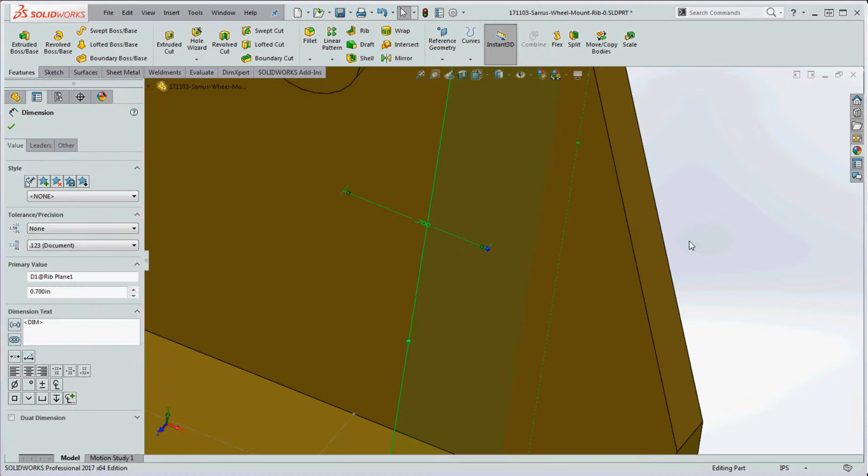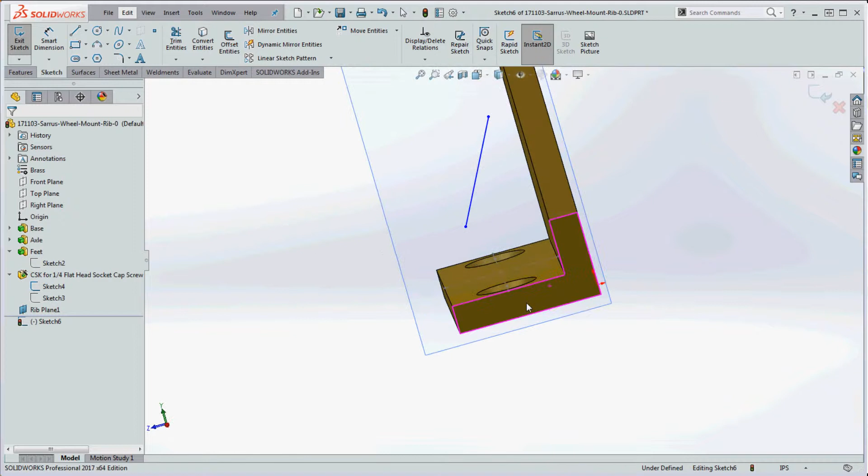We're just going to sketch a line. It's really easy to establish this - you don't necessarily have to have it fully defined. Let's go and rebuild this, and select this as the plane we want to sketch on. So what you want to do is just sketch a line out here arbitrarily, and it's going to put a rib in there.

Very simply, we're going to go up to Features, Rib, and we're going to choose a direction here. Now it's going in the wrong direction down here that we wanted - we actually wanted to go down here.

The rules of the rib are such that the line itself that's defining this has to intersect on a surface and then on an opposing surface on the other side. And the rib itself has got to be able to intersect on those surfaces too without hindrance.

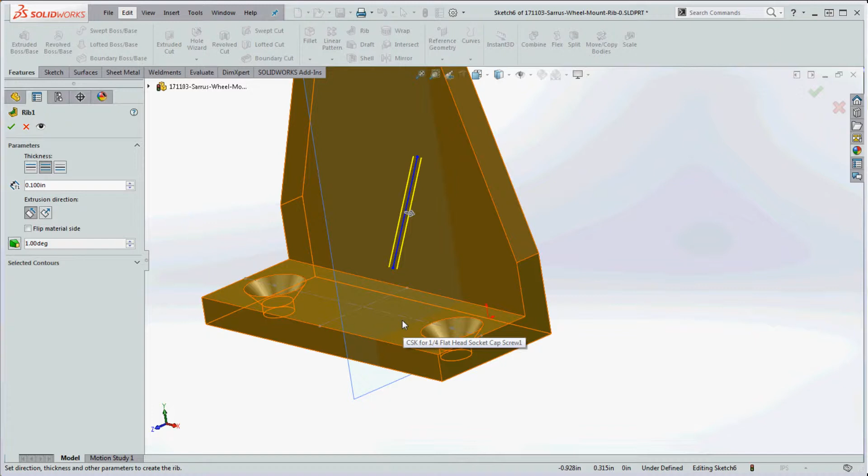It gives us an option down here for a draft, and typically with plastic injection molding, you probably want to have a draft in here. 2 or 3 degrees is probably okay. So click on the draft button. We're going to exaggerate that and put in 5 degrees. And if we go to the green check mark, now we have our rib.

You notice we didn't have that line fully defined, and here's our rib feature down here. If we were to right click on that and move it around a little bit if it isn't quite in the same location we want, we could do that too and rebuild it. Now that rib's a little bit smaller.

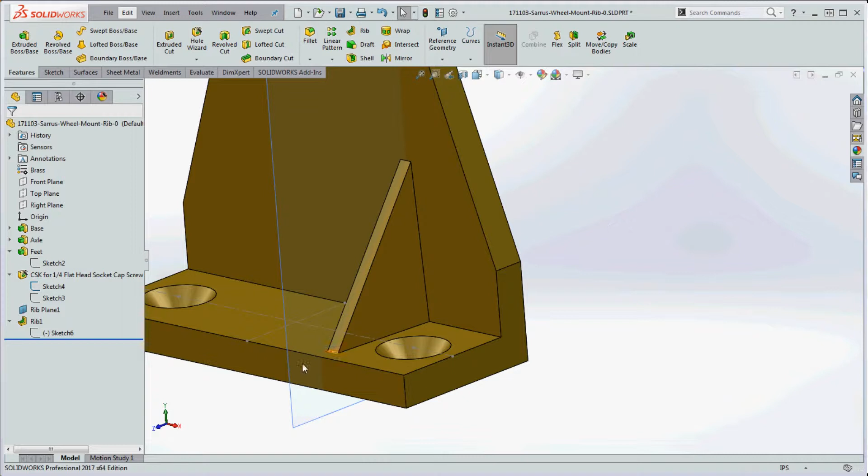So kind of like with all sketching, it's got a negative sign in here, which means you probably want to control that a little bit. We can go in here and actually define that. If we were to go normal to that plane, maybe park it down here and put some constraints in there, we could do that too.

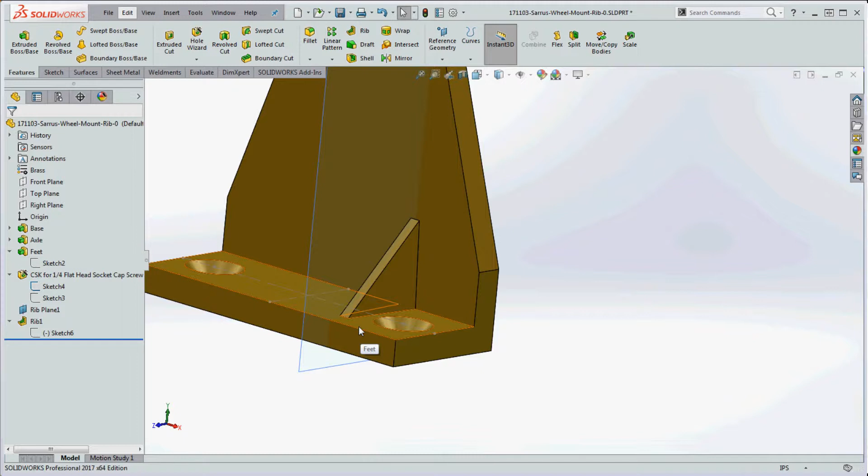If we were to actually extend it over on the other side, what do you think it's going to do? Let's go and rebuild it and see what happens. So you can be really loose with your sketches - you're still going to put that rib in there as long as you follow the rules: the line has got to at least terminate or go beyond one surface on one end, another surface on the other end, and then the rib feature has got to be able to terminate on those surfaces too.

So we could define this a little bit better. We're going to go normal to maybe pick up that edge over here, and then we can put in dimensions to make sure it doesn't go off to the side and other things. But let's just try one more parameter in here and see what that looks like.

Doesn't like it, it's failing. So it's breaking one of the rules. The endpoint of that line does not intersect with that surface on the solid body.

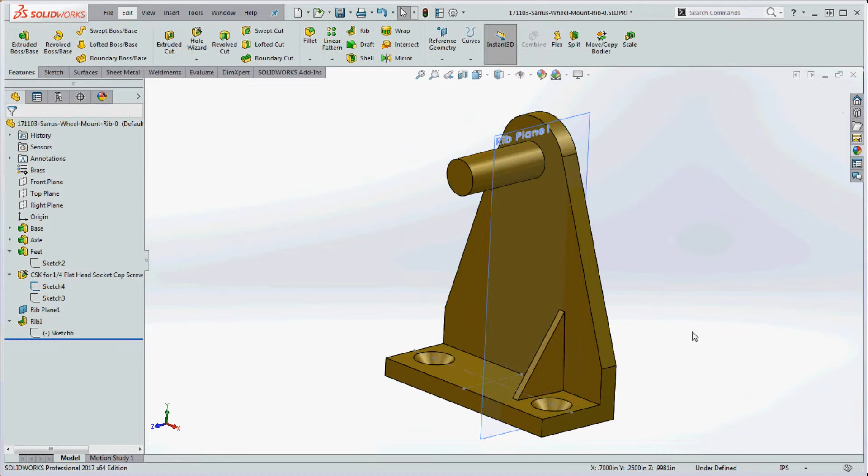But again, we can go back to that sketch, move that in a little bit, rebuild it, and then it comes back again. And you'll notice it does have that draft angle here too.

So to finish this up, for a plastic injection molded part, probably want to put a fillet on the edges over here, to give that a little bit more of a finished look.

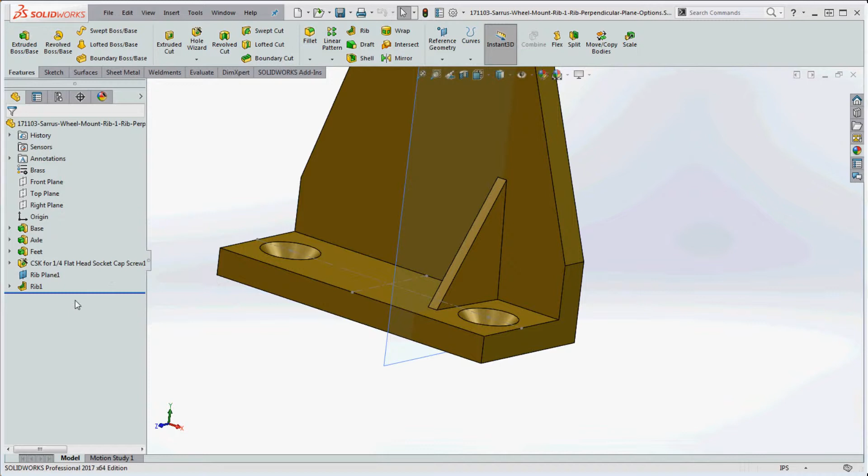Okay, so let's have a little bit more fun with this. Let's go ahead and use the rib on a different plane. Let's roll that rollback bar back. Now let's click on this and maybe the top plane, and let's define a whole new plane.

So if we were to go over here to reference geometry, we're going to go ahead and put in a plane. Right now it's just going to be perpendicular, but let's go ahead and put an angle on that, let's say about 60 degrees. And now we have another rib plane.

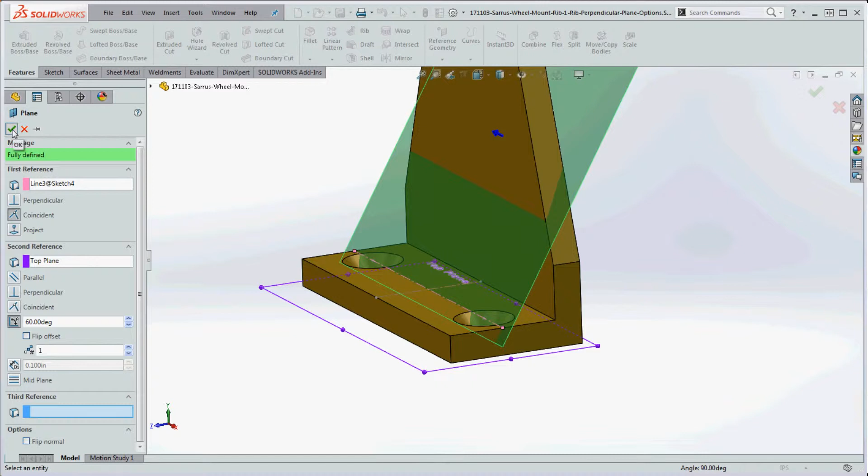So now we can sketch a line on that rib plane. If we go to sketch, let's just do a linear line. We don't necessarily have to make that perpendicular, but one of the rules with that—it's not even on that plane.

So let's go ahead and get rid of that sketch, rebuild it, select this plane, and do that all over again.

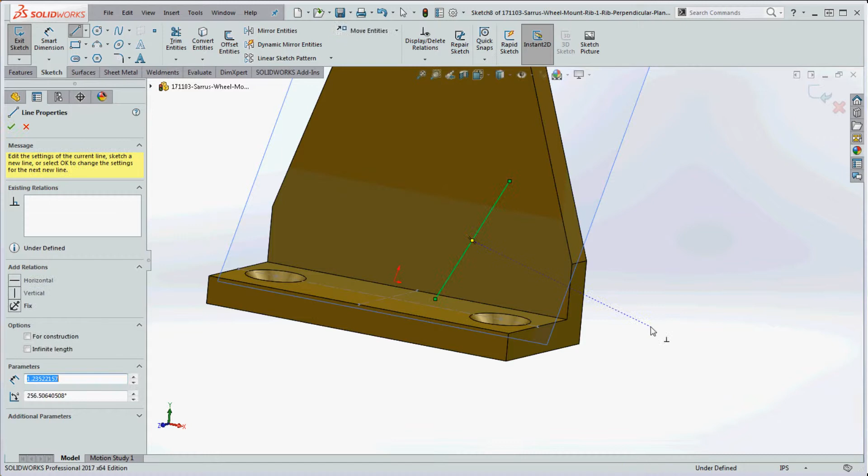So what we want to do is put a line on that plane. Not necessarily vertical, but let's kind of put it off at an angle here. Take a look at how that line's situated.

So the rule is, again, the line has to be terminated on either end, or has to either intersect or terminate the endpoint of that line on some sort of surface. And the same thing with the bottom part of that line too. If it goes off the surface like that, it's not going to work.

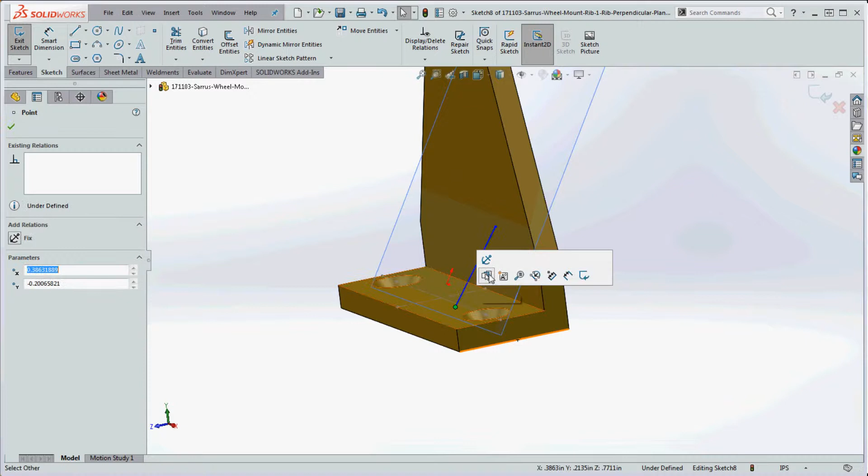If it goes through the surface, it'll work, as long as it intersects that surface. And then the rib itself has to be able to go from that line down to either surfaces where that line intersects, and it'll resolve itself.

So let's try that. Let's go up to Features, let's go to Rib. It's giving us a yellow preview, but it doesn't necessarily mean we're going to get what we want, and we need to turn that.

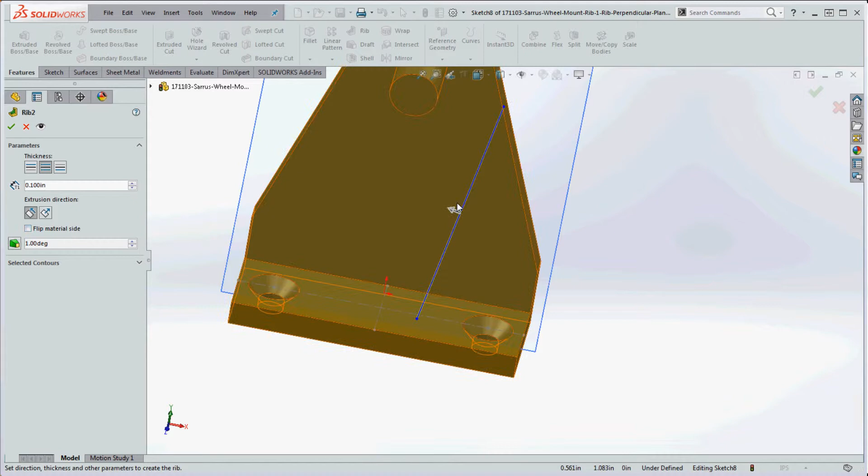So here's our options for turning that. We can go left or right by flipping the material side. We can do the same thing by clicking on that arrow. We can flip the material side, but that kind of violates the rules.

It's not going to terminate on any surface over here, it's not going to stop on any surface over there, so probably don't want to do that. But we can flip the material side, or we could actually go normal to the sketch.

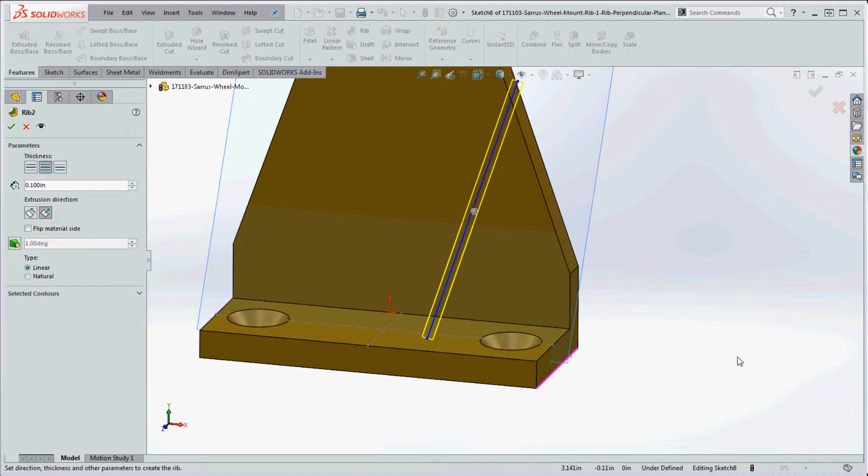So now we're normal to the sketch, but still going off in the wrong direction. So we're going to go ahead and flip that one more time, and now it should resolve itself. And if we go to the green check mark—bang, we have it.

So even though that line, if we were to take a look at that line, which is in the back—let's just go ahead and show that without all the angles associated with it and all that geometry that popped up. Now you can see that line's going off to the back, but it intersects this plane down here, and it's ready to go.

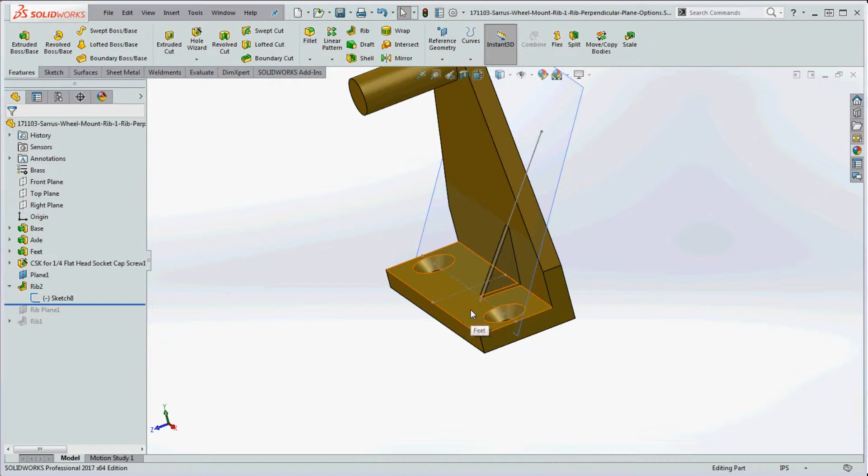So let's go back and play around with that sketch just a little bit more. We can pull that line in a little bit, kind of get it in the middle of the model instead of extending beyond it. So let's go ahead and pull that down.

Maybe pull this one up. Again, you could be really loose with your sketches in a rib, and it'll still resolve itself. So if we go to Rebuild, now we have something that's a little bit more oblique.

But, like typical sketches in a feature in SolidWorks, once you get the form that you like, it's probably good to go in there and fully define your sketch, so it doesn't move on you when you don't intend it to, when you make modifications to other sketches and features within your part.

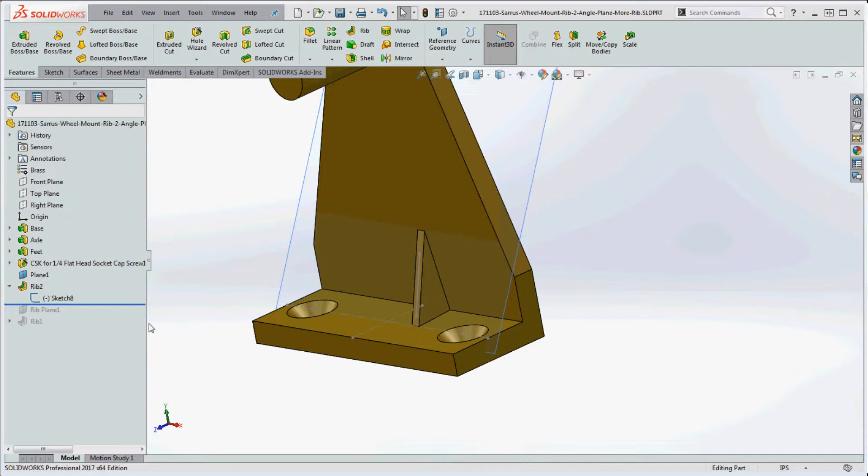Okay, let's take a look at some more options here. Let's go ahead and edit this sketch and do something a little crazy. Let's take that line and maybe put it right over that hole. If we put it near the hole, it's probably going to be okay.

It's going to resolve itself and drop into the hole and give us a solid in there. But if we go Rebuild here, it's not going to like that. But we can still take the endpoint of that line because it's not fully defined. Remember, you can do that outside of the sketch. And now you can see it resolve itself.

So it's resolving itself there, resolving itself here. And we're doing this outside of the sketch, so we're not having to go inside the sketch to make modifications. We could take the endpoint of that line and move that over here.

If we put that right over the hole, it doesn't like it. Put it over here, maybe. But it's definitely going to like it over here once it gets out of that hole.

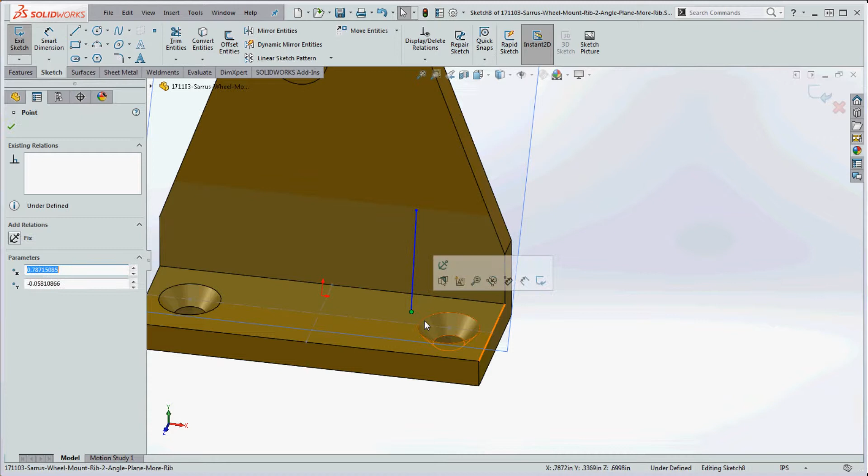So, I actually went in to edit the sketch, so let's go ahead and do that. And let's take that point and maybe put it over here, over there a little bit more, and when it clears that hole, it's able to resolve itself.

Okay, let's do a few more things. Let's look at some different applications of the rib feature. So let's take a rollback bar and roll that back over here above plane number 1.

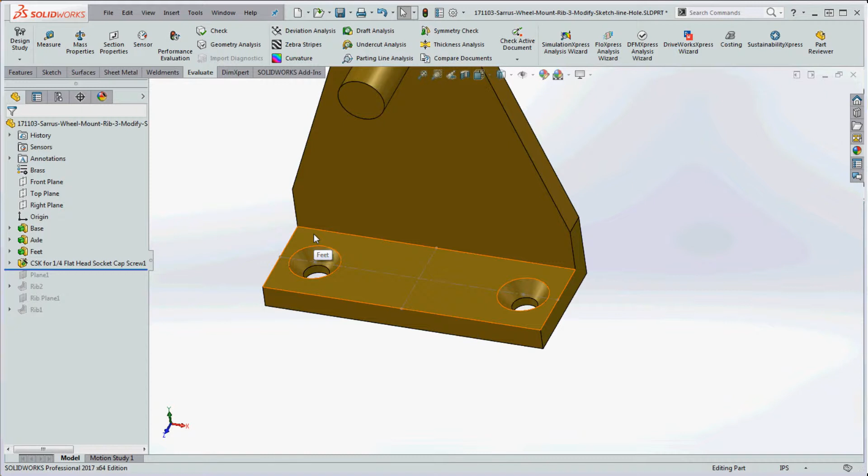And let's go ahead and maybe put a wall around these holes here. So what we're going to do is create a wall around these holes. It's going to create kind of a boss, and if it's a thin wall, sometimes you might want to support that, and a good feature to use for that is a rib, if you can imagine.

So we're going to go ahead and select on that face, go to Sketch, kind of click off here to the side, so we're going to select that face, and we're going to go to Sketch over here. We're going to go ahead and choose, again, that plane. And we're going to go ahead and choose that edge and this edge. With the Control key pressed, we're going to go to Convert Entities.

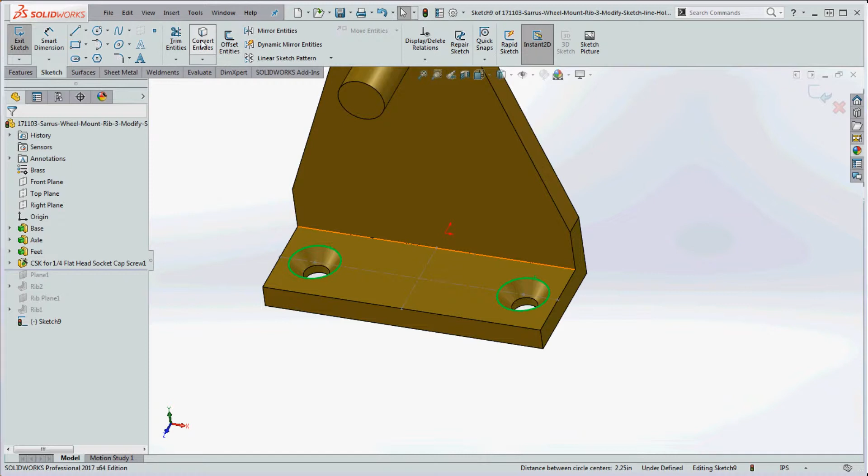Now we're going to go to Features, Extruded Boss Base. We're going to go down here to Thin Feature. Probably keep that at maybe 0.1. And let's go ahead and extend it up by maybe 0.4. And if we do that, now we can actually put a rib between this wall over here and that wall over here.

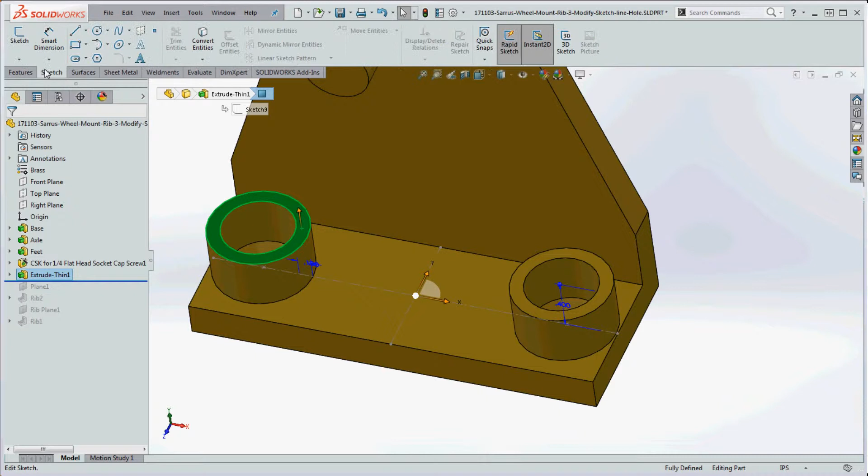So remember the rules. If we go ahead and sketch on this surface, go over here to line, we're going to make that line kind of go off to the side over here. It's going to try to extend that line until it meets the surface, extend this line until it meets the surface, or goes beyond the surface, or intersects the surface, and then it's going to go down. Once it's able to do that and go down, then it's going to go ahead and resolve its feature.

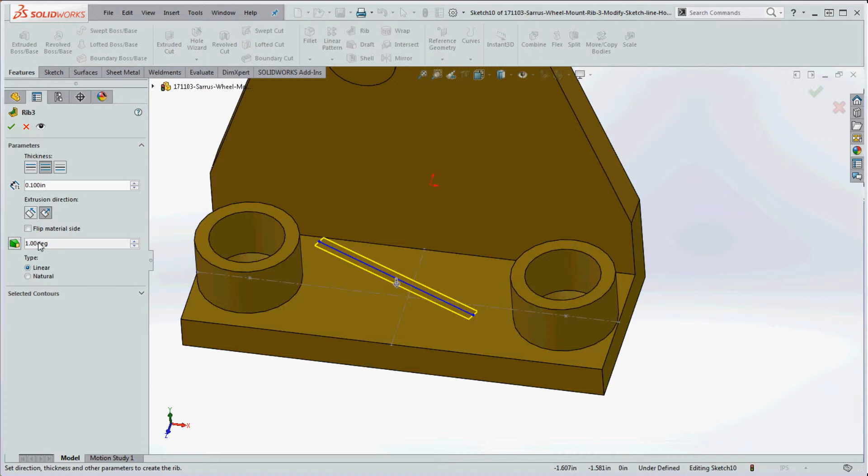So if we go to Features, go to Rib, we want to change the direction, so we want to go ahead and go down, make sure that arrow is going down. And we're not going to put a draft angle on it. We'll keep it at a 1/10 of an inch. If we go to the green check mark, it's not going to do it.

But we can take that line in here and maybe move that over here a little bit and try to do that again. So we'll go back to Rib, and in our PropertyManager, we're going to change the direction on that, go to the green check mark.

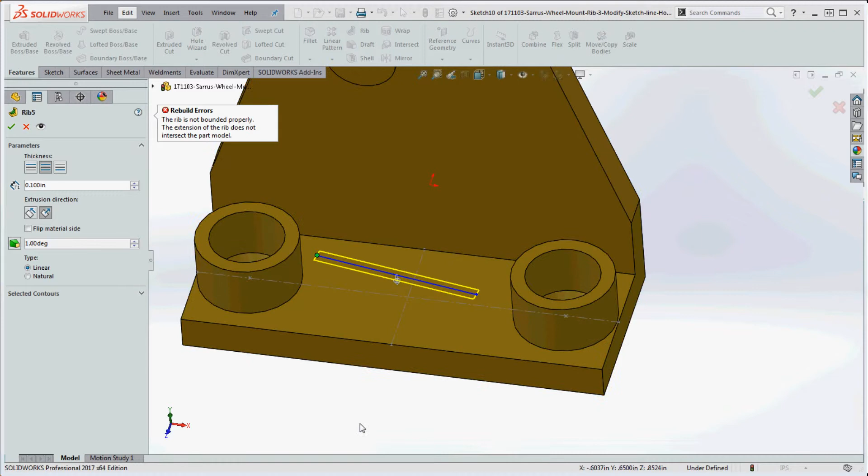Still not going to do it. So let's go ahead and take this line over here and do that one more time. Change the direction, go to the green check mark. Okay, well, it's still going off to the side. Yeah, that's a good idea to make that normal too.

Okay, again, back to rib. Change the direction, go to the green check mark. Now it's going to resolve itself. So that's one application, and if we put a draft angle on that, let's go ahead and try that, rib.

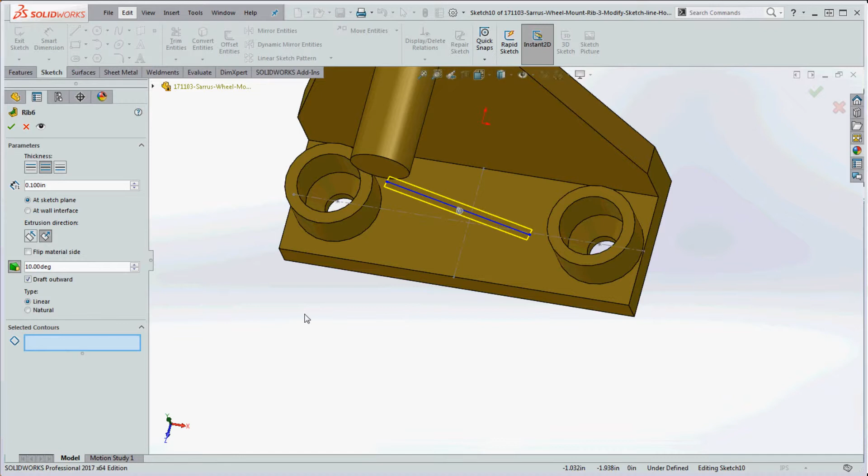6. Yours might be a different name. Let's go ahead and do a draft angle on it, and let's make that an exaggerated maybe 10 degrees, and go to the green check mark and see what that does. So what that does, and we don't want to draft outwards. Yeah, we do. But it looks like it's going off the model a little bit when we put that draft in there. So let's do this.

Let's take that line inside of this, and let's go ahead and bring that in a little bit. So we can do this.

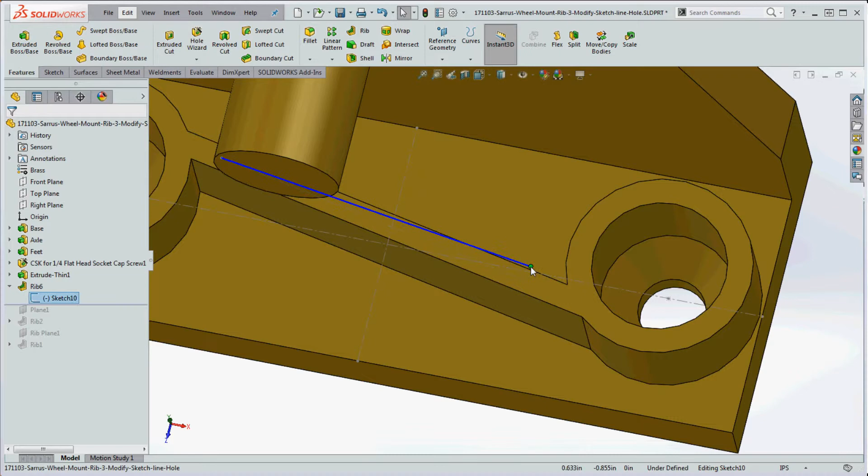I don't know if you knew this, but outside of the assembly, if we were to go ahead and show that line outside of the sketch tube, we can take these sketch parameters and actually move those around a little bit. And what it does is automatically rebuilds. That's a really cool feature.

You could do this in a lot of different features where you don't have defined sketches. It doesn't have to be necessarily part of the rib.

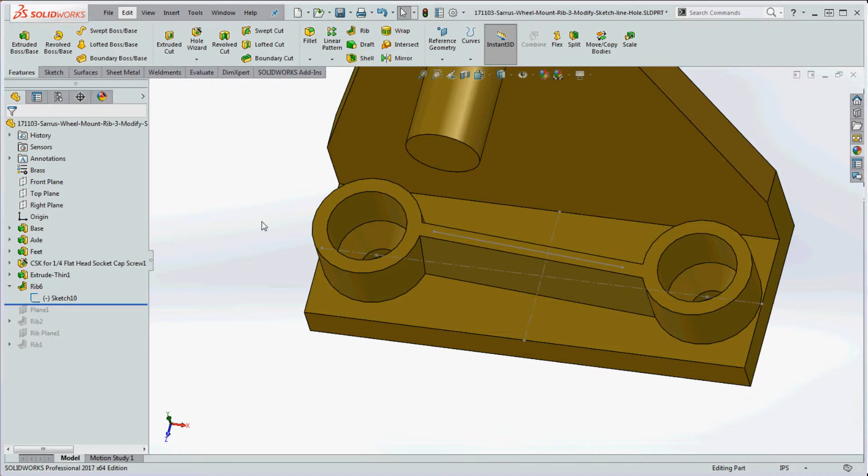And then now we can see that we don't have that draft angle on that yet. But if we go back to our rib number 6, go into that and put our draft angle in there of 10 degrees, now it'll probably resolve itself. So now we have that 10-degree draft. I think what was happening with that draft before is it was beyond the edge of this wall over here, and it didn't like that.

So another option over here with our underdefined sketch, if we were to right click on that sketch and do something different to it, let's go ahead and put a little bit of an arc on it. We'll put a tangent arc on the end of this and maybe curl that around and see what that does.

So if we were to rebuild that, so now it kind of does that. It takes that line, tries to terminate it at a wall that it's pointing to, and looks like it's going off to that wall over here too. But we can take that line and kind of tweak it a little bit, the end of that arc, and get that actually going into our model.

So this is kind of a very valuable tool, being able to make modifications to endpoints of lines and arcs and see what you like.

And if it's something you like, if there's a component over here you're trying to get around but still trying to support these walls, then it's a great way of doing that. You can get it around that component. Then when you get it, and when you want to fully define it, then you can put on your angles and your sketch relations and dimensions, get that fully defined.

Okay, so let's look at one last option in here. If we were to go to our rib 6, yours might be a different name. We can start from the top and actually work our way to the bottom.

So we kind of know what some of these are. It's kind of like a thin feature. We can favor it on one side. If we go to the green check mark, you can see how that resolves, and go back over here and do the same thing. We'd actually favor it on the other side too, rather than the middle.

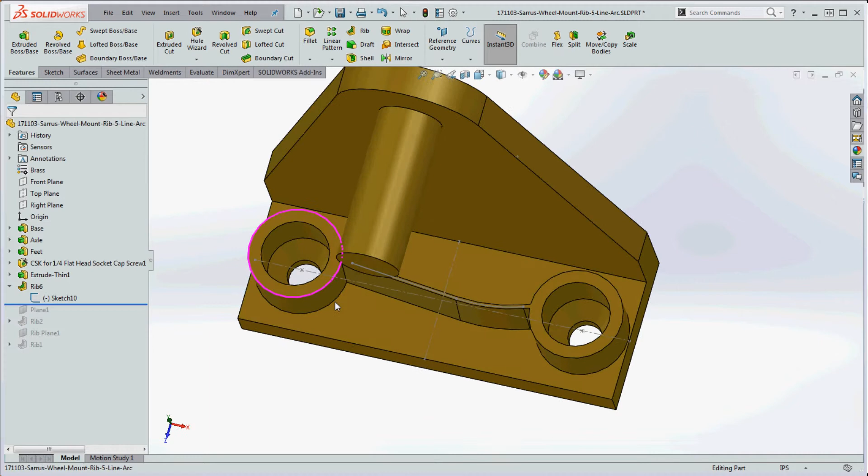Let's try a draft angle a little less than that. So instead of 10 degrees, let's do 5 degrees. So there we go. I think it was tapering up to nothing. If we made that rib a little bit thicker, it probably would have resolved itself better. So maybe 0.2 if we start down there at the wall instead of 0.1. Now if we did 10 degrees, maybe I'm pushing it over here, go to the green check mark, there it goes. So instead of tapering to nothing, it's coming up here, and it looks like it's resolving itself.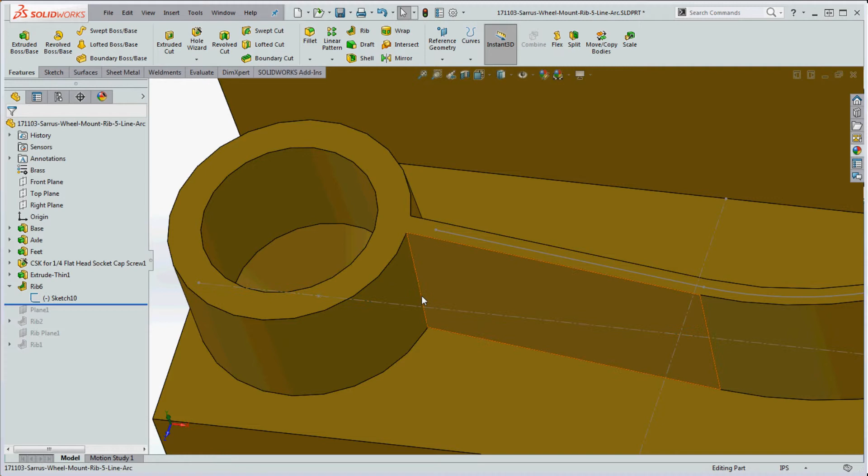Let's go back to our rib and look at one last final option over here. We can flip to the material side. We've already done that, started at sketch plane, and we've played with these buttons over here.

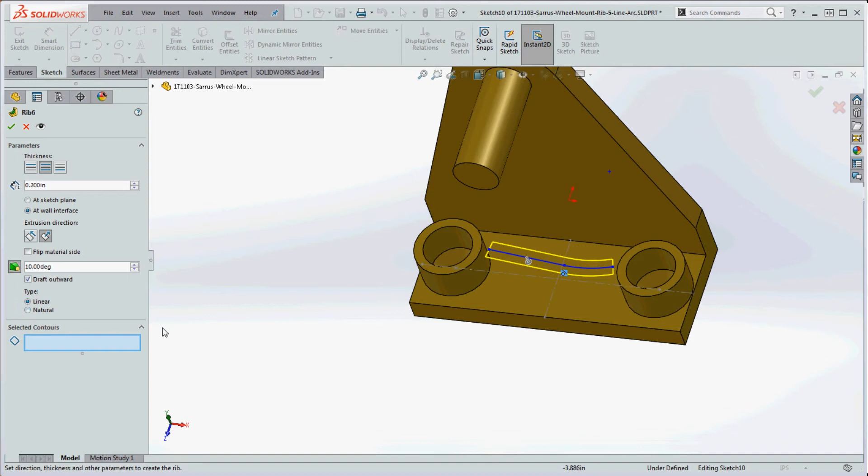But down here, we have the option of being linear or natural. Of course, everybody wants to go all natural. But the way this is going to resolve, if we think about this in regard to the linear function, and when it comes to the termination of that arc, it's wondering, well, what do I do? Do I go straight or do I follow the arc? If we choose linear, it's going to go right at the end of that and then go straight again. If we choose natural, it's going to curl a little bit and continue to follow that arc.

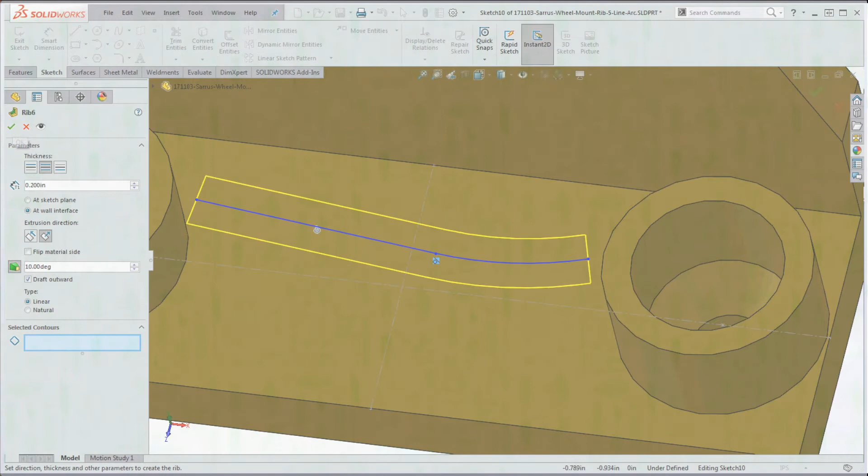So let's actually go to natural and see what that does. If we go to the green check mark, you can see it's got a little bit more curvature, but now we can take that arc and turn it out a little bit and see what it does. Turn it a little bit more so it terminates at that wall. Now it's ignoring this wall. So with a linear function, it wants to go into that wall, but now it's not going to do it. The arc is allowing us to do more stuff.

So now it's doing something weird here. It's actually trying to pick up some geometry elsewhere, and it's resolving that a little bit differently. So now it's not going to resolve itself at all there, but if you actually curve it over like that, it looks like it's going to stop right there at the very end of that.

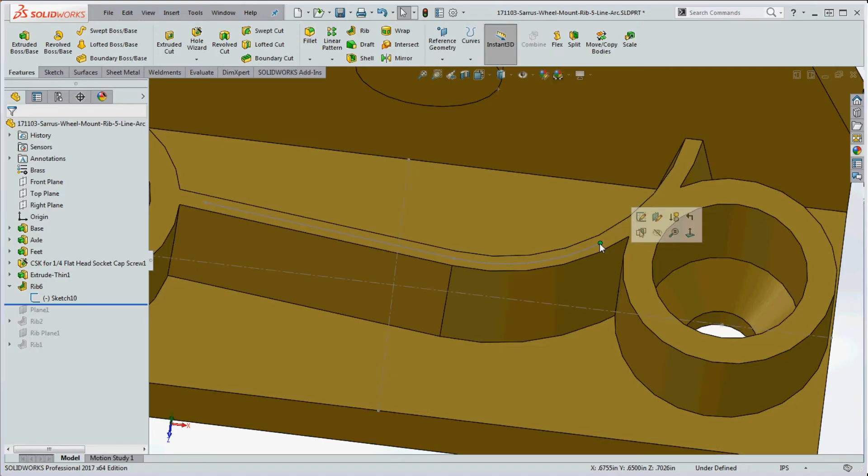So there's a certain extent that you can actually play around with this and get it to work right. In this application, we're just trying to put a rib in here to get a wall between walls.

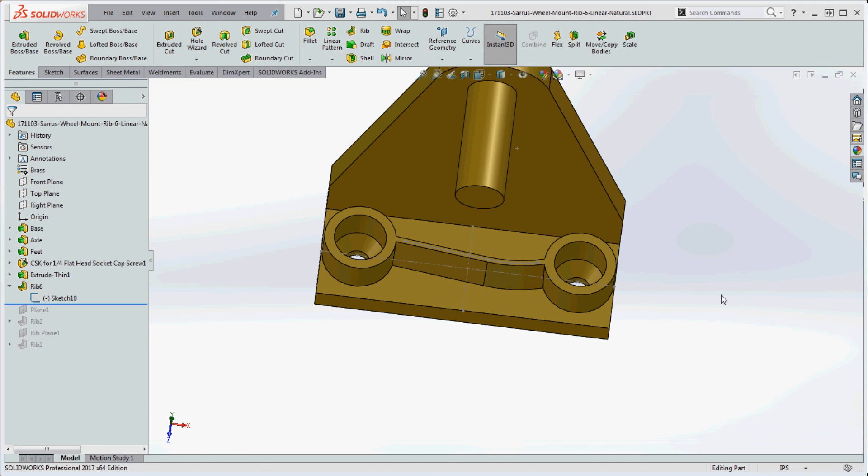So that's a rib feature, and it relies on perhaps some sketchy sketch geometry, at least at first. It uses underdefined lines at first, and arcs too, but you could define them later as you would with other features. It takes less work than it would with some other features in order to achieve the same result, but it's rule-based. The line has to extend or intersect between two different surfaces, and at 90 degrees of this line with a defined thickness, will extrude up or down to the next surface it runs into, and it needs that surface because without it, like we saw with the hole, you're not going to get any rib. So within these rules, a rib feature is the quick and easy down and out feature.